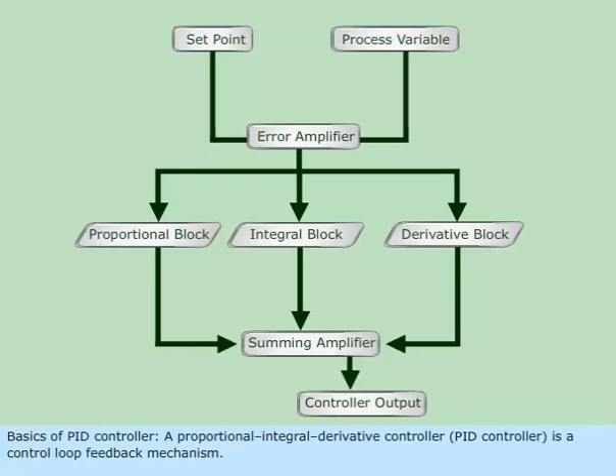Basics of PID controller. A proportional integral derivative controller, PID controller, is a control loop feedback mechanism. It is generally used in industrial control systems. A PID controller calculates an error value repeatedly based on the difference between a desired set point and a measured process variable.

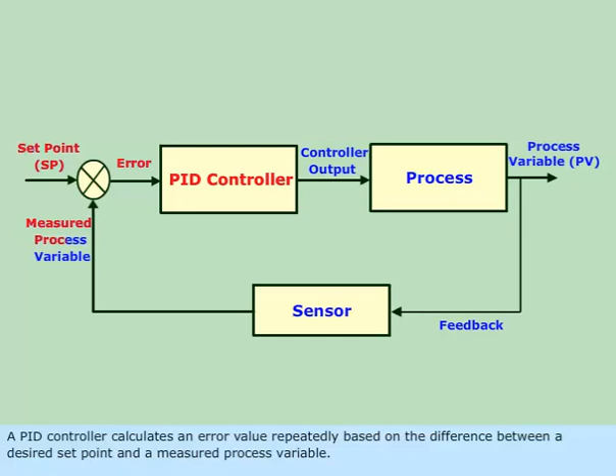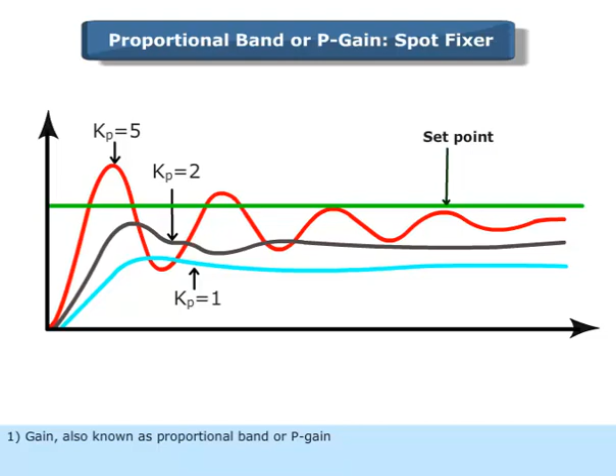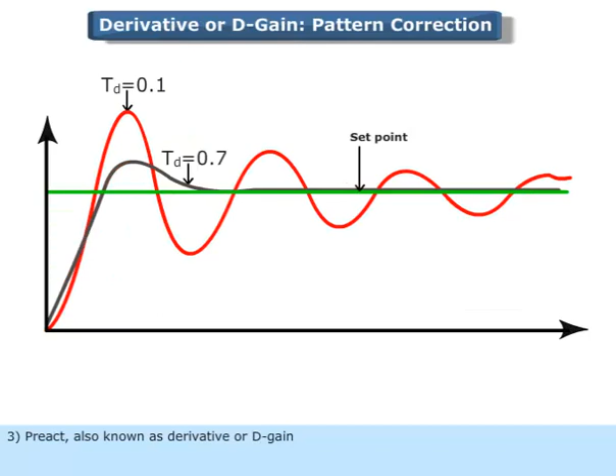Basic tuning parameters of PID loop include: 1. Gain, also known as proportional band or P-gain. 2. Reset, also known as integral or I-gain. 3. Preact, also known as derivative or D-gain.

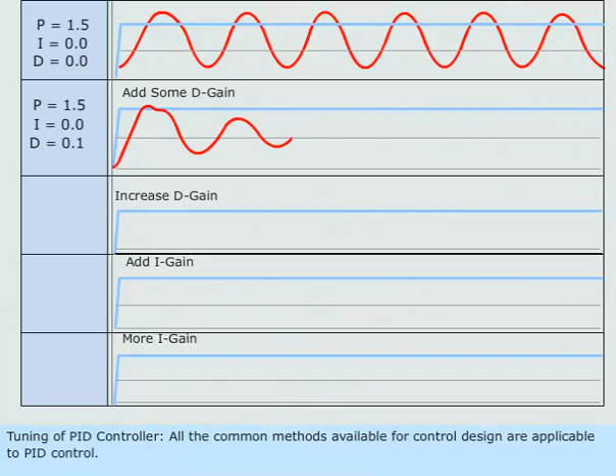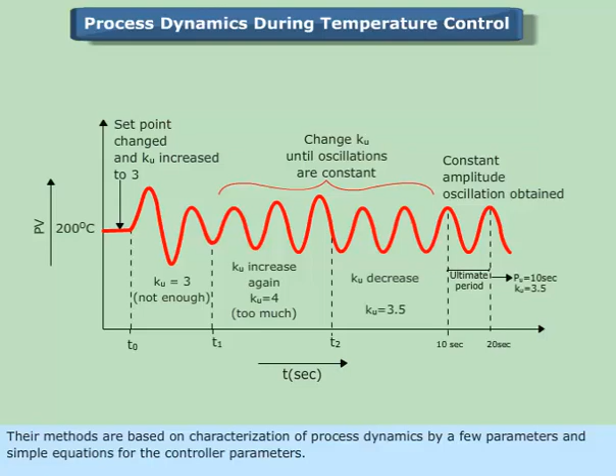Tuning of PID controller. All the common methods available for control design are applicable to PID control. There are also a number of tailor-made methods developed for PID controller, known as tuning methods. The most popular methods of tuning were developed by Ziegler and Nichols. Their methods are based on characterization of process dynamics by a few parameters and simple equations for the controller parameters.

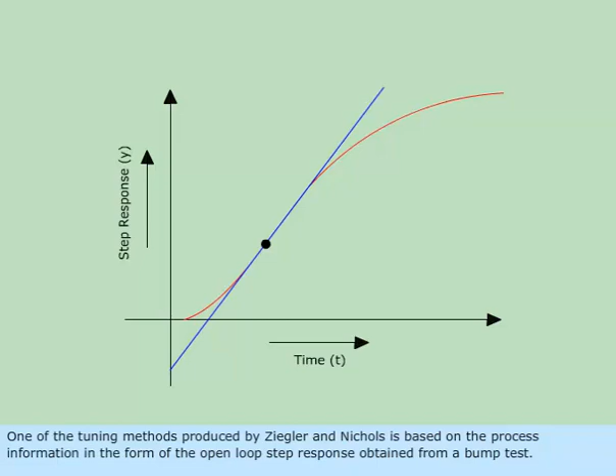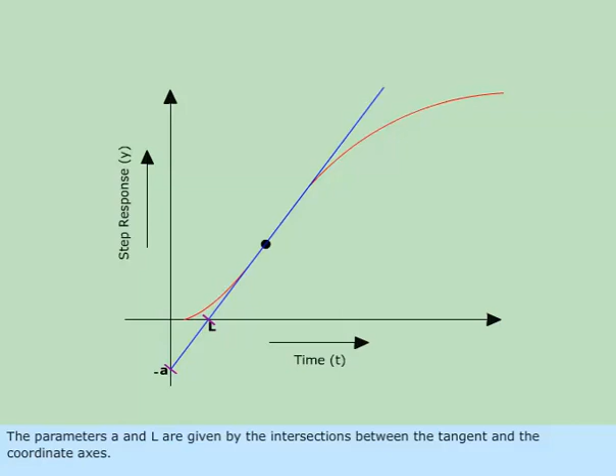Step response method. One of the tuning methods produced by Ziegler and Nichols is based on the process information in the form of open-loop step response obtained from a bump test. The step response is characterized by only two parameters, A and L. These parameters are given by the intersections between the tangent and the coordinate axes. PID controller parameters obtained from the step response method are as shown in the table.

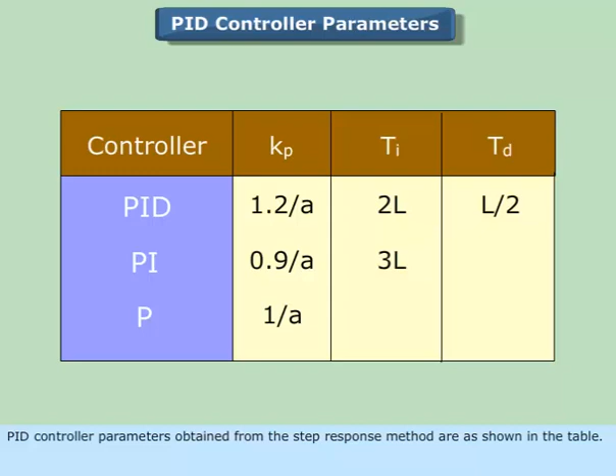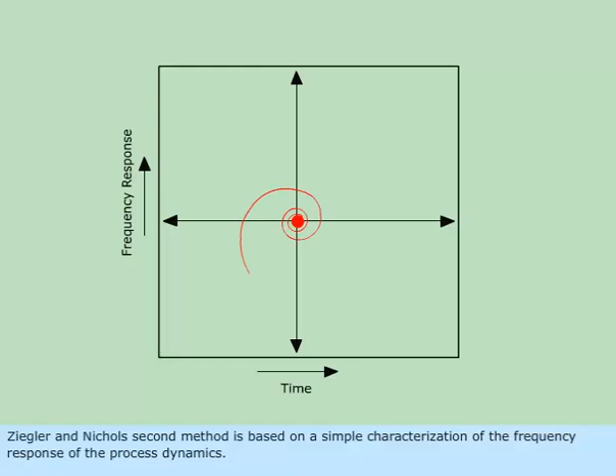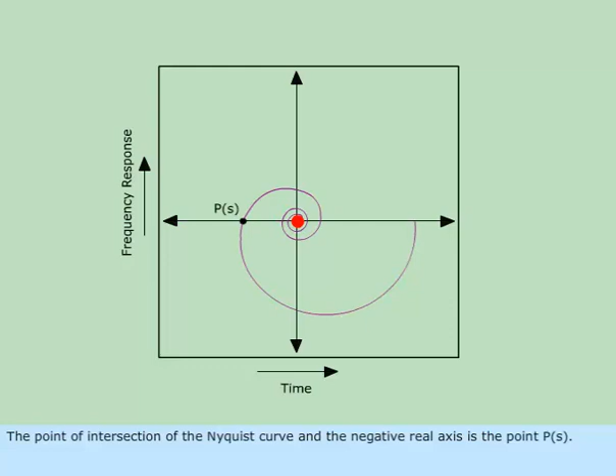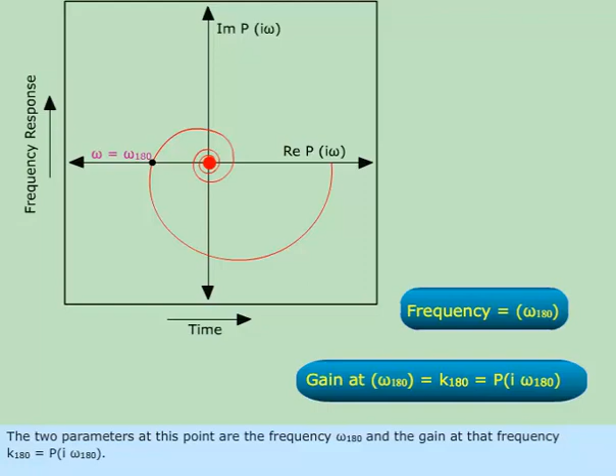Frequency response method. Ziegler and Nichols' second method is based on a simple characterization of the frequency response of the process dynamics. The point of intersection of the Nyquist curve and the negative real axis is the point P of S. The two parameters at this point are the frequency omega sub 180 and the gain at that frequency, K sub 180 equals P of i omega sub 180. It is characterized by two parameters, K sub U equals 1 over K sub 180, known as ultimate gain, and T sub U equals 2 pi over omega sub 180, known as ultimate period.

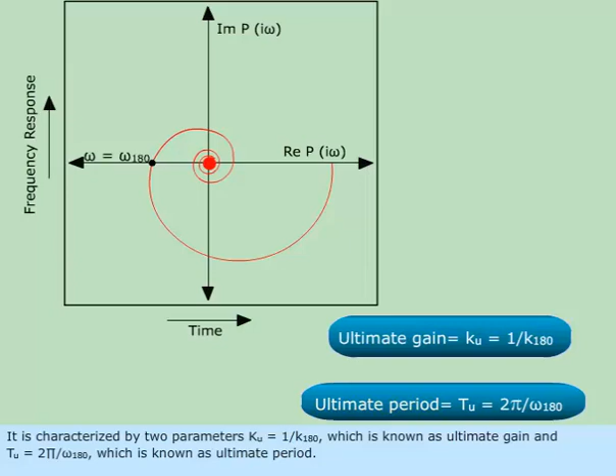Thus, you have learned about the basics and tuning of PID controller.